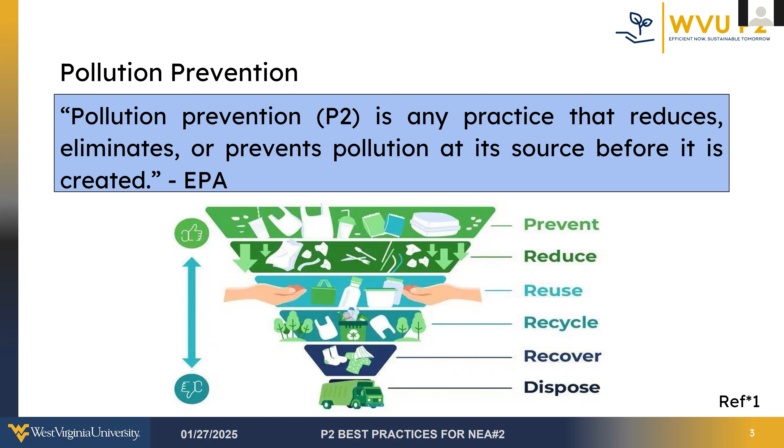So as part of the EPA's Pollution Prevention Initiative in 2015, several priority sectors known as national emphasis areas were identified. These 6 sectors were identified as priorities by the EPA Pollution Prevention Program to focus resources and efforts for maximum environmental and economic impact. These sectors offer substantial P2 opportunities and create a focused approach that allows for better resource allocation and the ability to share successful strategies across similar industries.

So the original 5 NEAs were the food and beverage manufacturing and processing industry, chemical manufacturing, processing, and formulation, automotive manufacturing and maintenance, aerospace product and parts manufacturing and maintenance, and metal manufacturing and fabrication. A sixth national emphasis area was established several years ago, and instead of focusing on a specific industry sector, the EPA realized the need for assistance with pollution prevention on tribal and native lands within the country.

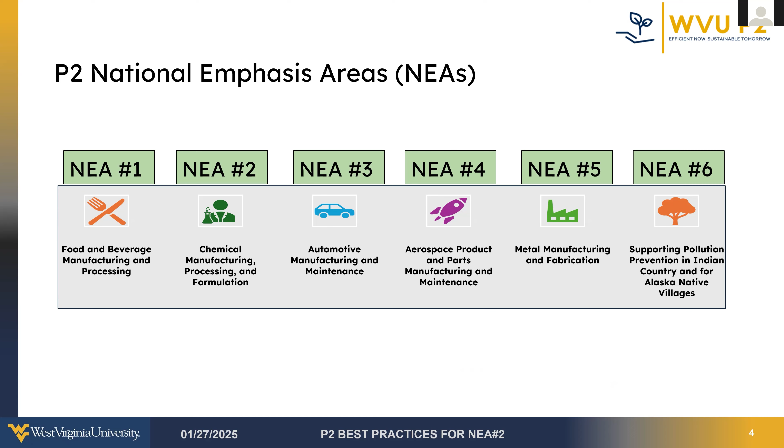So today's focus will be on the second NEA, chemical manufacturing, processing, and formulation industries.

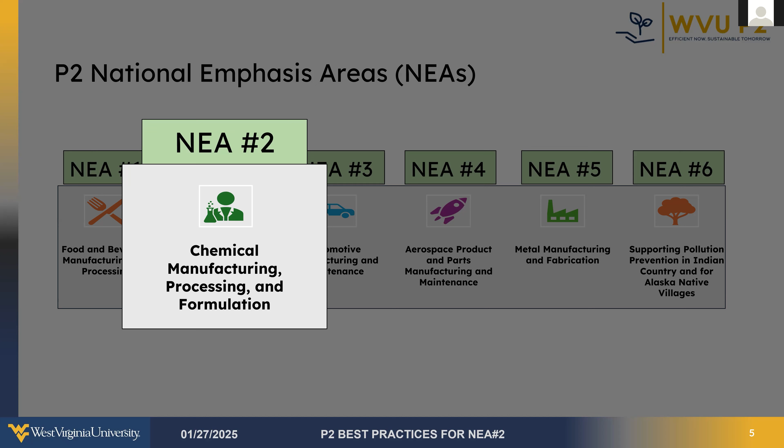So the chemical manufacturing, processing, and formulation sector includes industries classified in the NAICS industry classification codes, beginning with 325. So as of 2020, there were over 13,500 establishments within the sector, with 3,411 reporting to the Toxics Release Inventory.

So this chart shows the volume of waste managed by different approaches from 2011 to 2020 in this industry. So there was a significant increase in the proportion of waste managed through recycling and treatment during this period, as we can see with the size of the green section of the bars increasing. This positive trend indicates growing awareness and adoption of sustainable practices within the industry. The increasing reliance on recycling is a promising development, and these methods not only reduce waste disposal, but also contribute to resource conservation and energy recovery.

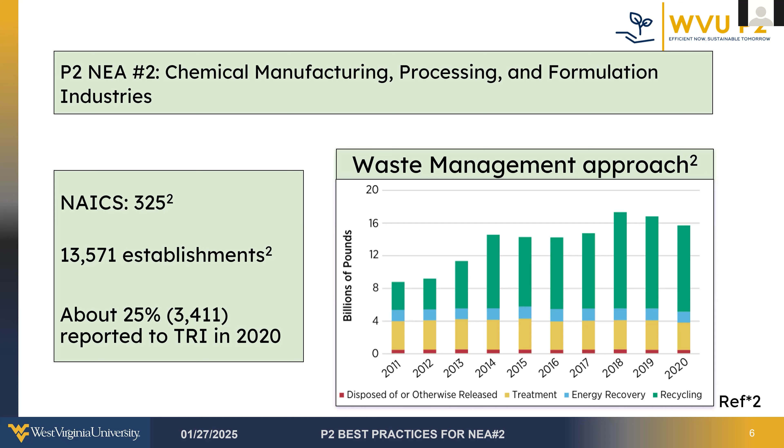Despite the progress, though, there's still a substantial volume of waste being disposed of or released, and the amount of waste being disposed has not actually decreased over time. So the recycling has just managed any additional waste that was generated. So there hasn't been much change in any reduction in the amount that's disposed or treated. So this represents an opportunity for further improvement and implementation of pollution prevention practices.

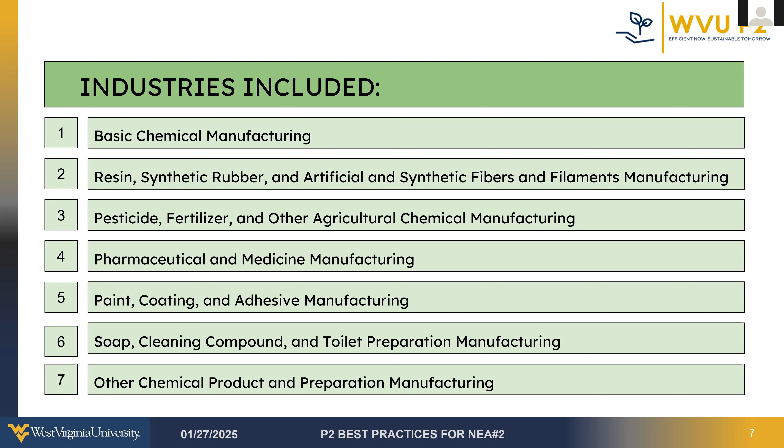So the NAICS 325 industry sector encompasses a wide range of industries that can be kind of divided into 7 categories. So basic chemical manufacturing; resin, synthetic rubber, and artificial and synthetic fiber and filaments; pesticide, fertilizer and other agricultural chemicals; pharmaceutical and medicine manufacturing; paint, coating and adhesive manufacturing; soap, cleaning and toilet preparation manufacturing; and other chemical product and preparation manufacturing.

So now that we've briefly discussed the diverse nature of the chemical manufacturing, processing, and formulation sector, let's discuss some best practices for this sector. And these best practices are divided into 4 broad categories. First, we'll discuss some best practices related to spill and toxic release control. Next, we'll discuss proper chemical storage practices. After that, we'll move towards discussing a few P2 practices related to waste management within these industries. And finally, we'll be talking about a P2 practice related to efficient water management.

So spill and toxic release control is a significant concern for industries in this sector. Unintended releases and spills of toxic chemicals, depending on the quantity, can have environmental consequences, risk the safety of the employees of the facility and those in nearby communities, and can result in significant costs, including cleanup and other fines or penalties. So let's look at a few P2 best practices related to spill and toxic release control.

So they're going to be preparing and maintaining a spill management plan, reducing styrene release in facilities producing styrene-based products, and maintaining optimal reaction conditions to reduce toxic chemical releases. So let's dive deeper into each of these practices, exploring how they can be implemented practically to make chemical manufacturing, processing, and formulation industries safer and more sustainable.

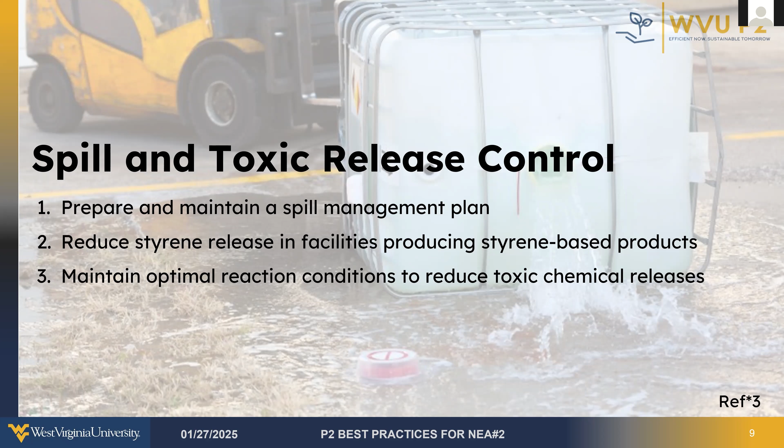First, prepare and maintain a robust, comprehensive spill management plan. Chemical spills are one of the most critical challenges faced by chemical processing and manufacturing industries, and the consequences of these spills can go far beyond the immediate cleanup and can have long-lasting impacts, especially on the environment. So chemical spills can be a concern in many different industries. The chemical manufacturing industries are certain to have large supplies of chemicals, which can make them unique from other industries. So when a chemical spill occurs, it's much more likely to be a large quantity spill, resulting in a much larger impact.

So chemical spills can cause environmental damages, including contamination of the soil, water bodies, and the air, which can disrupt ecosystems and can endanger wildlife. Chemical spills also present safety hazards, since the chemicals used are often toxic, flammable, or corrosive in nature and are used in large quantities. These spills can pose significant risks to workers. And if the spill is a large quantity, it can also affect residents in local communities or in other nearby businesses.

Next, spills can cause operational disruptions that affect business operations, including delays or halts in production. And furthermore, chemical spills can tarnish a company's reputation, making it harder to maintain customer trust and stakeholder relationships. And additionally, failure to manage spills properly can lead to severe penalties, including fines or even suspension of operations. The Clean Water Act requires many facilities to maintain spill management plans, so failure to have a spill management plan may be a compliance issue in and of itself.

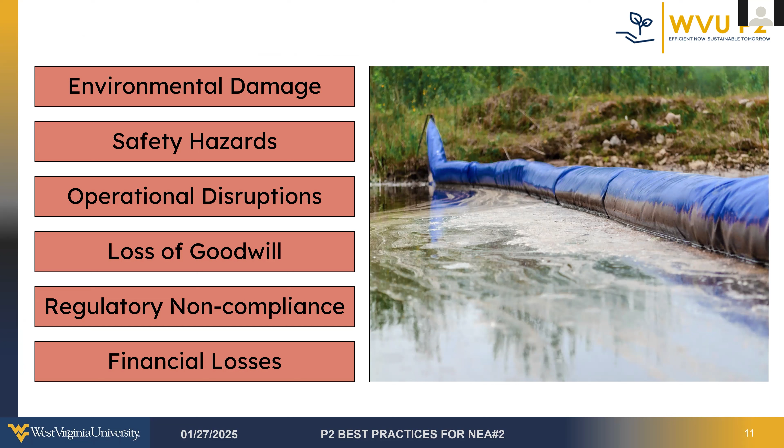So avoiding chemical spills and reacting quickly and appropriately when they do occur is the best way to minimize these losses. A chemical spill management plan defines these procedures and these requirements. So let's take a look.

So a spill management plan serves as a structured and systematic approach to prevention, management, and mitigation of the impacts of spills in industrial settings. Not only does a robust spill management plan help ensure the safety of the employees, but it can also ensure that other damages and impacts are minimized. Responding to a spill promptly and appropriately can help protect employees, the environment, equipment, and other resources.

The first step in creating a spill management plan is conducting a risk assessment of the facility. This involves identifying chemicals that are used within the facility, their quantities, their hazards and risks, and potential spill scenarios, and evaluating the risks they pose to people, the environment, and operations. So when possible, steps should be taken to minimize the risk of spills occurring. By understanding the specific hazards and vulnerabilities, we can prioritize preventive measures and be better prepared to respond to incidents.

The next step in creating a spill management plan is developing a clear response plan that outlines the step-by-step actions to be taken when a spill occurs, including emergency response, containment of the spill, and mitigation and cleanup. At each step, safety of the employee and others that could be affected by the spill is crucial. Sometimes the most appropriate response will be immediate evacuation of the facility and surrounding areas.

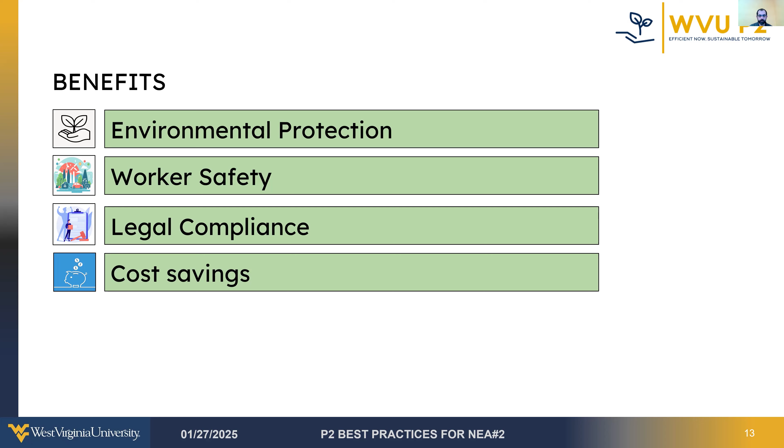So the next best practice that we'll discuss surrounds the use of styrene and reducing its release. Styrene, which is also known as ethenylbenzene, is a colorless, flammable liquid, and it's commonly used in the chemical manufacturing industry. Styrene is derived from benzene and ethylene via alkylation and dehydrogenation. Styrene has many uses within the chemical manufacturing sector, such as the following.

Styrene is the building block of polystyrene plastics. Polystyrene is used to make styrofoam, which is used for insulation foam and disposable food containers and cups. Another use of styrene is in manufacturing synthetic rubber. This type of rubber is used in tires, belts, and the production of footwear. Next, styrene is also used as a solvent in the production of resins and coatings, including paints, adhesives, and sealants.

Reinforced plastics, such as those used in automotive and marine industry applications, utilize styrene in their production. And then there are other copolymers like acrylonitrile butadiene styrene, ABS, that are used for making durable goods like appliances and toys, and those also require styrene.

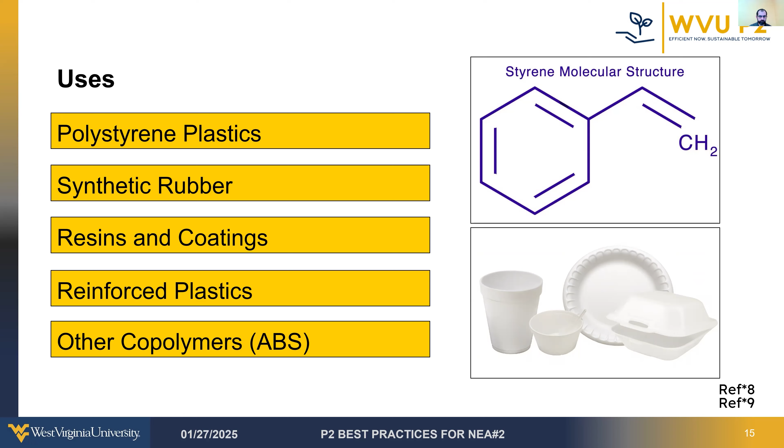So exposure to styrene is harmful for humans and for the ecosystem. Styrene exposure poses significant health risks with a range of acute and long-term effects. Acute exposure to styrene can cause irritation of the eyes and mucous membranes, causing discomfort and potential damage to the respiratory tract. Acute exposure can also lead to systemic issues such as headaches and fatigue, which can affect well-being and reduce productivity. Long-term exposure to styrene can affect the central nervous system, causing dizziness, confusion, and other neurological dysfunctions.

Continued exposure can also result in peripheral neuropathy, characterized by nerve damage that impairs mobility and sensation in the extremities. It can cause hearing loss and greatly impacts individuals' quality of life. And furthermore, styrene is classified as a probable human carcinogen, meaning that it's likely to cause cancer with extended exposure. So these health impacts underscore the urgent need for enhanced safety measures in industries handling styrene to protect workers and surrounding communities.

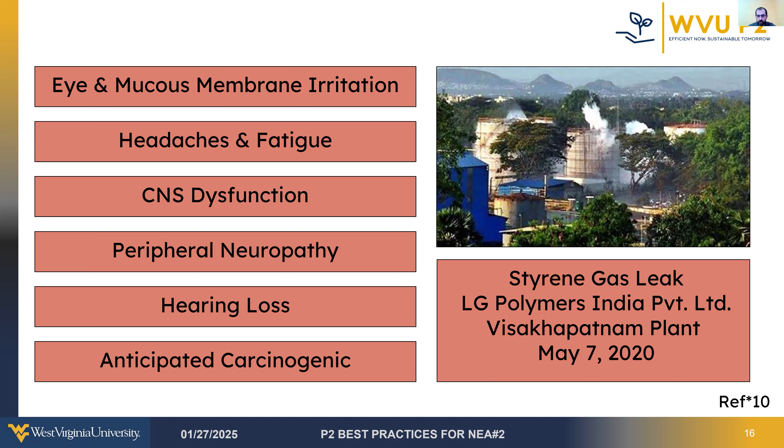So to emphasize the risks of styrene, in May of 2020, there was a tragic styrene leak at a plant in India. This gas leak at the LG Polymers plant resulted in 12 deaths and over 300 hospitalized, and 20 of those that were hospitalized were in severe condition requiring ventilator support to recover. So in addition to the health effects of styrene, releases into the environment can harm aquatic life and contribute to the formation of smog.

So what are some steps that can be taken to reduce the risk of styrene exposure? The best way to avoid the risk of styrene exposure is to not use styrene at all. As mentioned earlier, styrene has solvent and non-solvent uses. In processes where styrene is used as a solvent, substituting in a less or non-toxic alternative may be an option, such as acetone or water-based solvents. On the other hand, when styrene is used as a building block for plastics specifically, switching to polyethylene-based plastics may be a viable option. So getting away from the styrene and using polyethylene instead.

So when styrene can't be substituted, processes should be assessed for opportunities to reduce its use. For example, minimizing overspray when spraying styrene-based products and using activated carbon filters to capture the vapor are good options to minimize exposure. Optimizing operating practices is another option. Ensure that styrene storage, transportation, and the use of styrene all follow industry best practices to minimize risk of major accidental releases.

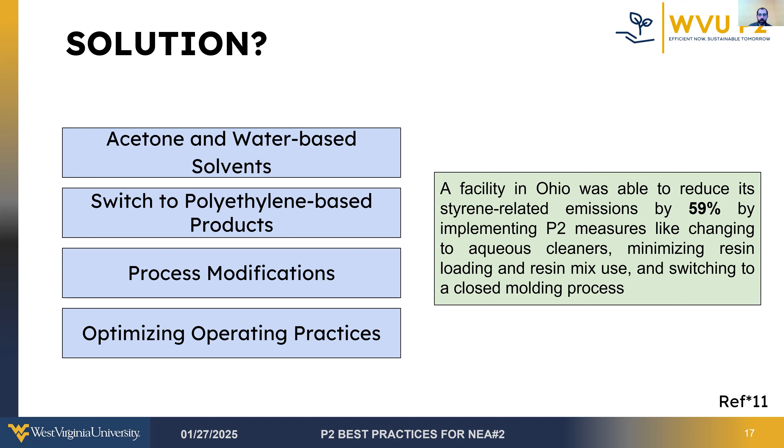So in the case of one Ohio-based plastics product manufacturer, styrene release was reduced from 32,000 pounds to 13,400 pounds over a 10-year period utilizing these sorts of practices. That was a 59% reduction in styrene release over that period. They were able to do this by switching from styrene-based cleaners to water-based cleaners, minimizing resin loading and resin mix use, and switching to a closed molding process where the resin isn't exposed to the atmosphere while it's curing.

So the next best practice that I'll discuss will be maintaining optimal reaction conditions to reduce toxic chemical releases. Improper chemical reaction conditions can pose significant challenges in the chemical manufacturing and processing industries. Some of the risks of improper chemical reaction conditions are: first, they can lead to the formation of unwanted byproducts. These byproducts can disrupt the desired chemical pathway and reduce the yield of target products. This inefficiency not only wastes raw materials, but it also contributes to reduced reaction efficiency, which ultimately lowers the overall productivity of the process.

The generation of byproducts and unoptimized processes results in higher waste management costs. Companies must allocate significant resources towards safely handling, treating, or disposing of chemical waste, leading to higher operating costs. Also, any additional raw materials, energy, and labor required to compensate for the inefficiencies will further increase the operating costs. Improper reaction conditions can also compromise the quality of the final product, resulting in a product that may not meet market or regulatory standards, which could damage the company's reputation and customer trust.

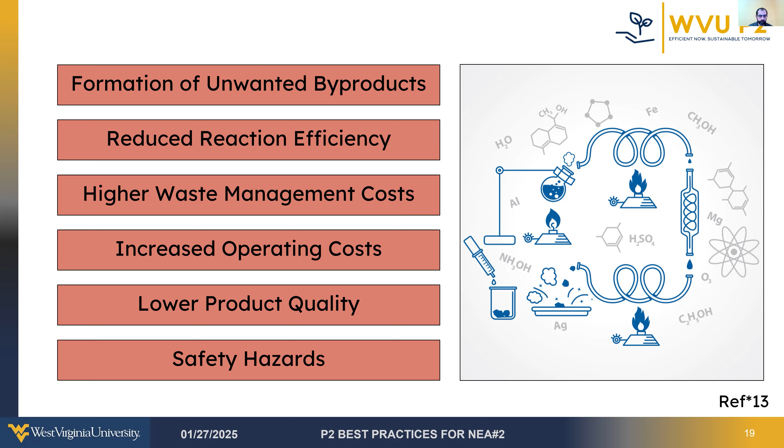And finally, improper reaction conditions introduce safety hazards. Deviations in temperature, pressure, or reagent concentrations can result in uncontrolled reactions, potentially leading to fires, explosions, or the release of toxic substances. These risks endanger both workers and the surrounding environment. So there are a few methods that can be used to maintain optimal reaction conditions. Automated monitoring systems are one of the best options. These systems enable real-time tracking of important parameters such as temperature, pressure, and concentration, ensuring that optimal reaction conditions exist. When conditions deviate from expected, the operator will be able to respond immediately.

Additionally, collecting and analyzing sample data on the product in real time can help ensure that the process is running as expected, ensuring precision and reliability. So by closely monitoring these systems, if things do fall out of line, we can get them back in line quickly and avoid any potential problems. Operator training programs are also going to play a critical role in ensuring that personnel are equipped to manage processes effectively, identify potential issues, and respond appropriately to ensure optimal chemical reaction conditions. And additionally, the condition of the equipment can impact the reaction conditions, so regular assessment and maintenance of process equipment should be implemented. Keeping machinery in top condition prevents malfunctions that can disrupt reactions, create safety risks, or cause chemical reactions to deviate from what is required.

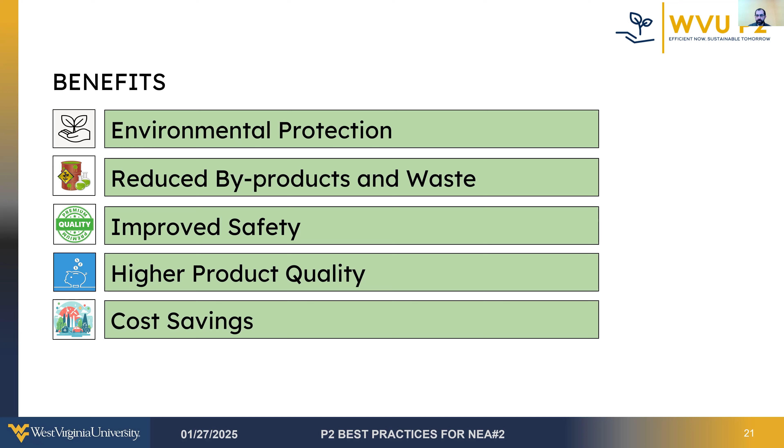So ensuring that chemical reactions are optimized leads to several benefits. Better control over the reaction conditions helps protect the environment by reducing the risk of industrial accidents or disasters and reducing byproducts and waste that may be at risk of ending up in the environment. There are also safety benefits to these as well. Industrial accidents can cause injuries or deaths, and anytime that waste must be handled, it can create additional risks. Optimal reaction conditions also ensure higher product quality, and all these benefits together lead to cost savings and an improved bottom line.

So moving on to the next section, we'll discuss a best practice related to chemical handling. And that's going to be implementing proper chemical storage practices. So improper chemical storage practices can cause several issues. Poor storage conditions often lead to chemical deterioration, where chemicals and other stored substances degrade over time, losing their effectiveness and potentially generating hazardous byproducts. This often happens when an accurate chemical inventory is not maintained and chemicals are quote unquote lost. If these degraded chemicals are eventually used, it can affect the quality of the final product.

Another critical issue is increased risk of leaks and spills. Improperly sealed or stored chemicals can escape their containers, leading to environmental contamination, workplace hazards, and cleanup challenges. These incidents also contribute to increased chemical waste, as spilled or degraded chemicals can no longer be utilized, requiring additional resources for disposal. The combination of these factors creates significant safety hazards. Leaks, emissions, and deteriorated chemicals can increase the risk of fires, explosions, and other toxic exposures, posing a serious threat to both workers and, in large enough quantities, to surrounding communities.

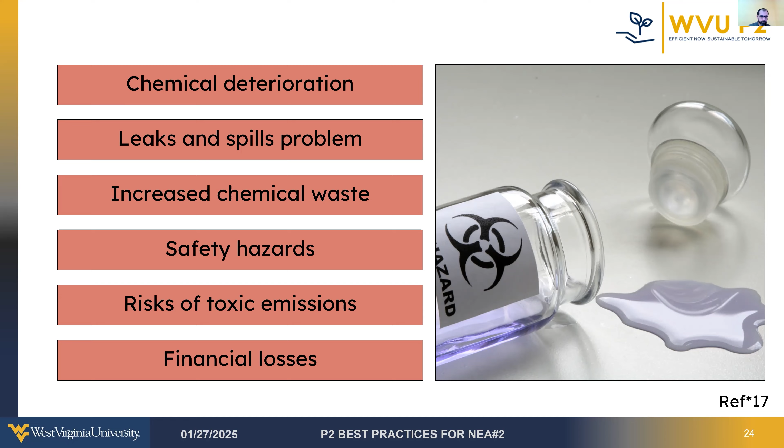Additionally, improper storage heightens the risk of toxic emissions, which can harm workers' health, pollute the environment, and result in legal and reputational damage for companies. So altogether, these problems lead to various financial costs, leading to unnecessary financial losses. So the following are steps that should be taken when storing and organizing chemicals. So the first step above all of this is going to be creating a chemical inventory. So the amount and location of each chemical in the facility should be recorded and maintained, and safety data sheets for each of these chemicals should be compiled and readily available in the facility.

During this time, the following practices should also be implemented. So the first is going to be classification and segregation. So chemicals should be grouped and stored based on their compatibility to prevent dangerous reactions, such as mixing acids with bases or oxidizers with flammable substances. This practice minimizes risks and ensures safer handling. Next is going to be labeling and containment. Proper labeling ensures that every container is clearly identified with its contents, hazards, and handling instructions. Additionally, secure containment prevents leaks, spills, and exposure to harmful chemicals, safeguarding workers and the environment.

So environmental factors such as temperature, humidity, and ventilation must also be carefully monitored and regulated to prevent chemical deterioration or unintended reactions. Chemicals need to be protected from external harm, such as physical damage, fire hazards, or other contamination. So proper shelving, spill containment systems, and fire suppression mechanisms are all essential measures to ensuring safety. And finally, routine inspections are crucial. Regular checks can identify and address potential issues like damaged containers, labeling errors, or deteriorating conditions before they escalate into significant problems. But again, all of this starts with maintaining a chemical inventory and just knowing where all of your chemicals are.

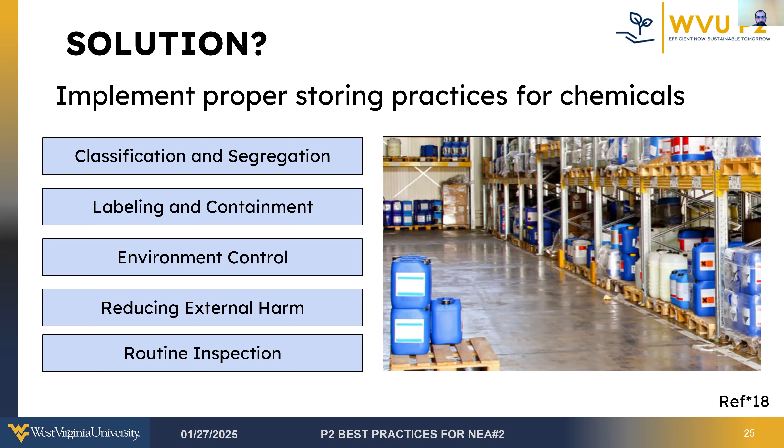The proper chemical storage practices offer significant benefits to the chemical manufacturing industries. So first is going to be environmental protection. These practices prevent spills, leaks, and toxic emissions, reducing the risk of contamination to soil, air, and water. Proper storage ensures chemicals remain stable and usable for longer periods of time, leading to reduced chemical waste and more efficient utilization of resources. Industries also benefit from regulatory compliance, as adhering to storage standards helps meet legal requirements, avoiding unnecessary fines or penalties.

Also, minimizing loss from wasted chemicals, unnecessary repurchases, accident-related downtime, and other cleanup due to improper storage leads to cost savings. And finally, these practices significantly enhance safety by reducing the risk of fires, toxic exposures, and hazardous reactions, creating a safer environment for workers and surrounding communities.

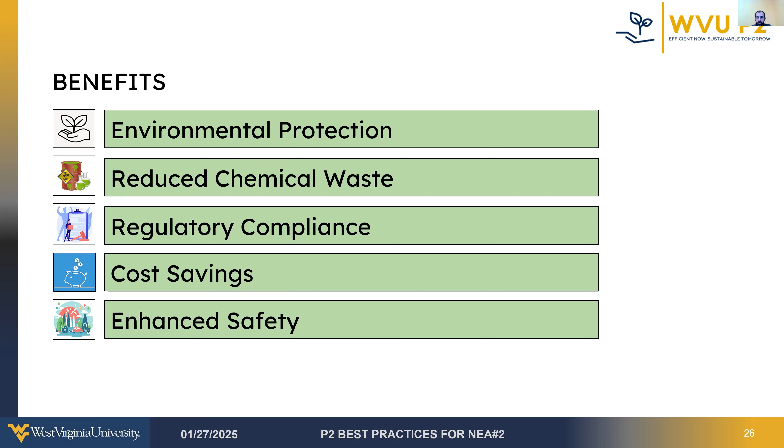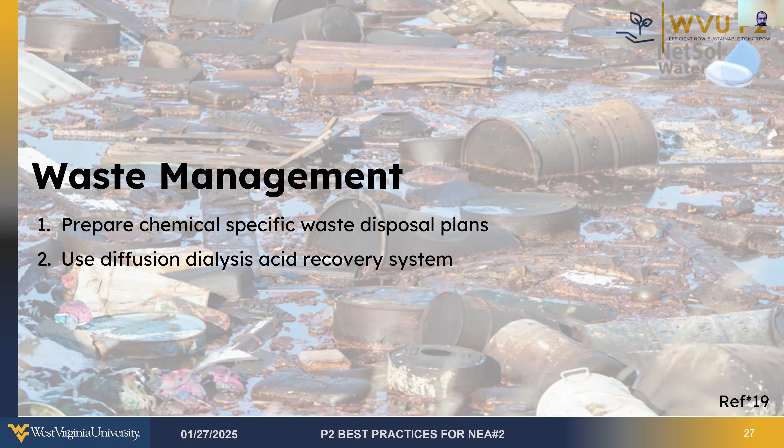So next, let's talk a little bit about waste management. So waste management is crucial in these industries, as the waste is often more toxic than in other industries. Since different chemical wastes have different properties, preparing and implementing specific waste disposal plans is a step that can be taken to reduce risks.

Improper waste management can cause a multitude of problems. For example, it creates environmental hazards since it increases the chances of toxic chemicals being discarded improperly. Improper waste management, specifically mixing incompatible chemical wastes, can lead to unintended reactions such as the release of toxic fumes, corrosive substances, or hazardous byproducts.

This can cause significant harm to the environment by contaminating water, soil, and air, posing long-term ecological consequences. It also risks the safety of employees and nearby residents and businesses.

Moreover, mixing chemical waste complicates the separation and treatment processes, making management and disposal more resource-intensive and time-consuming. Specialized treatment would likely be needed, which increases waste disposal fees and leads to lower operational efficiency. There are also potential fines for violating waste management regulations.

Furthermore, incompatible chemical mixtures can release harmful gases or vapors, endangering not only workers, but also nearby communities and ecosystems when quantities are large. These emissions can also result in regulatory violations and reputational damage.

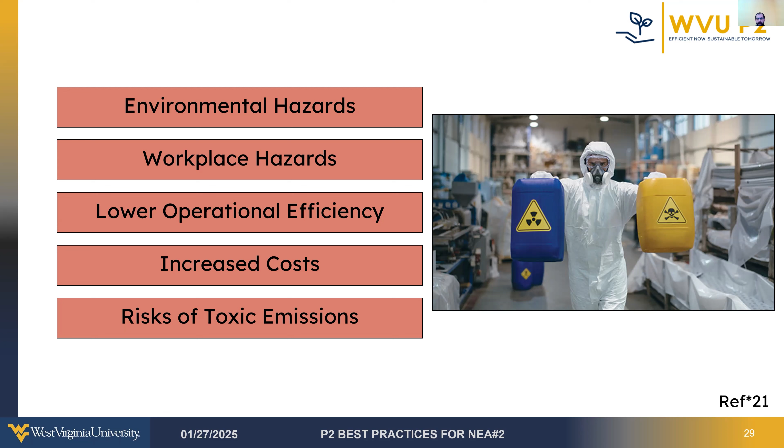Some chemicals as waste can be mixed together if they're compatible, but if there's any uncertainty, chemical waste should be isolated individually. Some of the guidelines for chemical compatibility when it comes to waste disposal are as follows.

First, waste from strong acids and strong bases should be stored separately in corrosion-resistant containers with the contents labeled clearly. If waste from acids and bases are mixed in an uncontrolled manner, it can result in unpredictable chemical reactions and generation of extreme heat and dangerous fumes.

For disposal, acids and bases can often be neutralized in a controlled manner to create pH-neutral solutions that are easier to dispose of. For example, sulfuric acid waste from fertilizer production and sodium hydroxide waste from soap manufacturing can both undergo a neutralization process. However, care must be taken when selecting the neutralization agent, and the process should be monitored and controlled carefully to maintain safety.

Organic solvent waste should be isolated, as it requires specialized disposal. Since these solvents are often toxic and volatile, their disposal involves incineration at high temperatures in facilities with pollution controls.

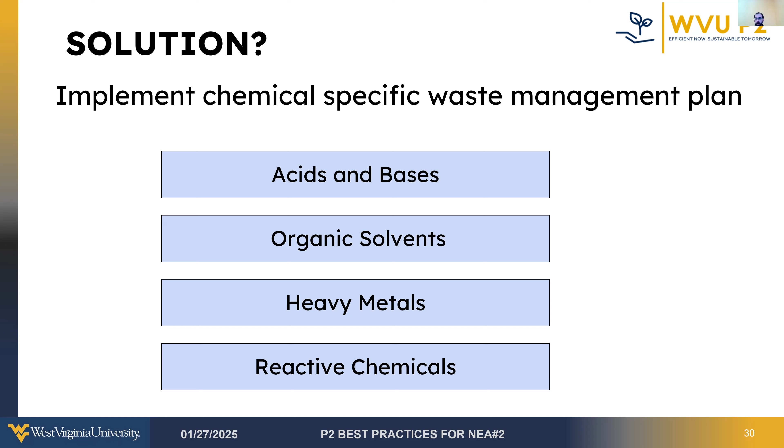As an example, sodium metal waste from petrochemical refining and peroxide-containing waste from polymerization processes must be stored separately from incompatible substances and heat sources to avoid potential risks.

Improper disposal of pharmaceutical waste, including expired drugs or solvent residues, can lead to contamination of water supplies and ecosystems. Pharmaceutical waste management involves segregating active and non-active pharmaceuticals, followed by incineration or chemical treatment.

Radioactive waste, which is often generated in the chemical processing industry through the use of catalysts or tracer studies, requires segregation based on its half-life, along with shielding during storage to prevent radiation exposure. For example, uranium or thorium used in catalysts, as well as low-level radioactive isotopes, must be logged in detailed records and handled under strict protocols before being sent to specialized facilities for disposal.

Biological waste presents another challenge, especially in bio-based production industries. This waste includes materials contaminated with infectious agents, such as enzyme residues from pharmaceutical fermentation or from microbial byproducts. The disposal process involves autoclaving or incineration, which sterilizes the material before final disposal. To ensure safety, biological waste should be collected in biohazard-marked containers and handled with appropriate personal protective equipment.

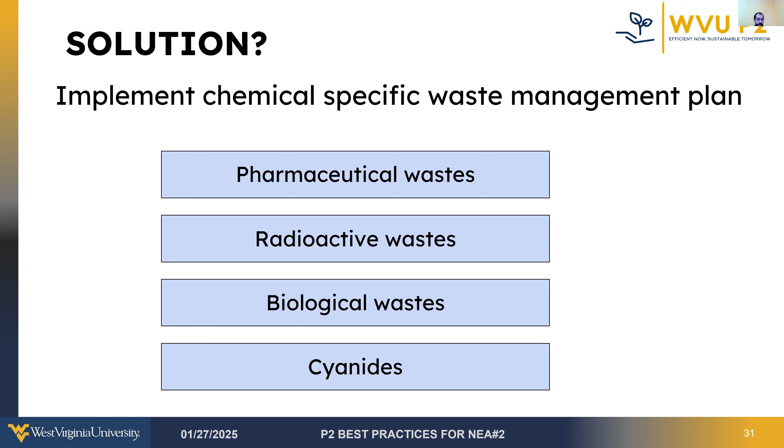So appropriate chemical-specific waste management will have several benefits. First and foremost, these plans ensure environmental protection by preventing harmful waste from contaminating soil, air, and water, thus preserving ecosystems. Secondly, they facilitate resource recovery by enabling the segregation and recycling of reusable materials, reducing overall waste and promoting sustainability.

Furthermore, these practices also help industries achieve regulatory compliance, avoiding penalties while maintaining a positive reputation for adhering to environmental laws. Additionally, appropriate chemical-specific waste management offers cost savings by minimizing waste disposal fees and reducing the need for remediation after accidents or spills. And finally, proper waste disposal plans significantly enhance workplace safety by mitigating risks associated with hazardous chemical reactions, reducing the likelihood of fires, toxic emissions, and worker exposure to harmful substances.

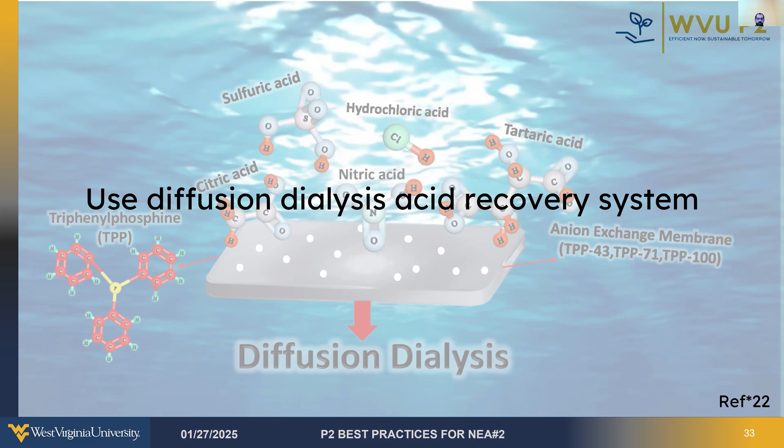So in the previous slides, we briefly discussed neutralization of waste acids, but there is another potential option there, and that's the recovery of acids using a diffusion dialysis recovery system. So first, let's talk about the consequences of improper disposal of acid waste. So acid waste poses environmental hazards, as improper disposal can lead to soil degradation, water contamination, and harm to aquatic ecosystems. Such pollution can have long-term ecological consequences and damage biodiversity.

In the workplace, acid waste introduces significant hazards, as exposures to acidic substances can cause burns, corrosion of equipment, and dangerous reactions that increase the risk of fires or toxic emissions, jeopardizing worker safety. Also, failing to manage acid waste properly can result in regulatory compliance issues. Strict environmental laws govern acid waste disposal, and violations can lead to heavy fines, operational shutdowns, and reputational damage. And waste of many acids can be recovered for reuse, but without proper systems in place, these valuable resources are lost.

So the solution here, as I said, is implementing a diffusion dialysis acid recovery system. And this is one of the most effective methods of recovering acids for reuse. So a diffusion dialysis acid recovery system is a membrane-based separation technology. And in these systems, acid waste is passed to a specialized diffusion dialysis unit containing semi-permeable membranes. These membranes allow acids to selectively diffuse through, separating the usable acid from impurities in the waste. The recovered acid that's diffused through the membrane is collected, ready for reuse in the production process, while the remaining impurities and waste can be safely disposed of.

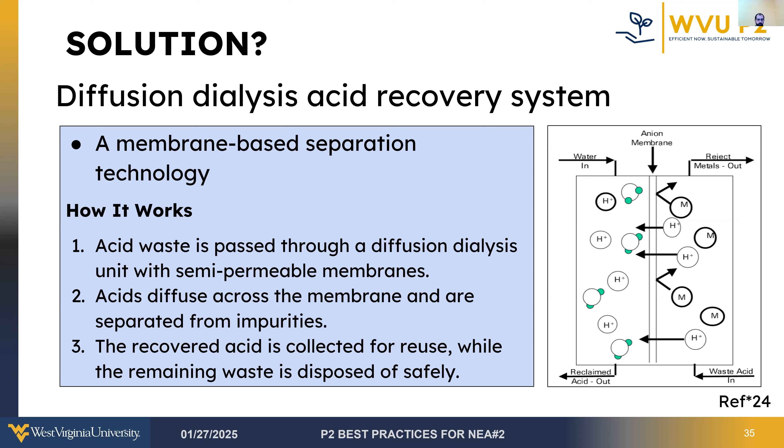So the system as a whole kind of works as follows. The used acid is metered through the system and is in contact with one side of the membrane, and that's an anionic exchange membrane. So water, on the other hand, is metered in a countercurrent fashion on the recovery side of the membrane, which causes the majority of the acid to migrate through the membrane, rejecting contaminants such as heavy metals along the way.

Then the purified acid and water is directed back to the process tank, while the contaminated spent acid stream continues to the metal recovery waste treatment for further processing. And fresh acid in proportion to the unrecovered amount is added to the bath to maintain the concentration within the correct operating parameters. So in one case study, a stainless steel fittings manufacturer was able to recover 86% of the nitric acid they used in the process using this technology.

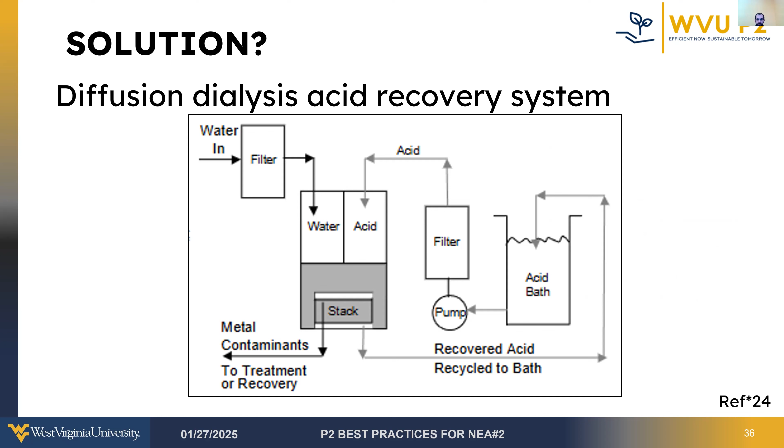So the use of diffusion dialysis acid recovery systems helps to recover acids and reduce hazardous waste resulting from acid contaminations. This leads to multiple benefits, including protection of the environment from the acid waste, resource recovery, maintaining compliance with regulations, and altogether financial savings. So as I was mentioning, in this one case, there's an Illinois manufacturer of stainless steel fittings and flanges. They operated a 1,500 gallon pickling bath composed of nitric acid and ammonium bifluoride. And they were changing this bath every 6 to 8 weeks, or about 7 times per year.

And as a result of this, they were incurring annual costs of $18,000 for disposal and $13,000 for fresh chemicals. So some engineers from the Illinois Sustainable Technology Center assisted them with implementing a diffusion dialysis acid recovery system, which allowed them to recover 86% of the nitric acid and 30% of the ammonium bifluoride. So this reduced their need to recharge the bath from 7 times per year to 2 times per year. So that proved to be a cost-effective and sustainable solution that saved them upwards of $10,000 a year. So there were reduced disposal costs, reduced chemical costs, reduced pickling time, and decreased rework with those modifications.

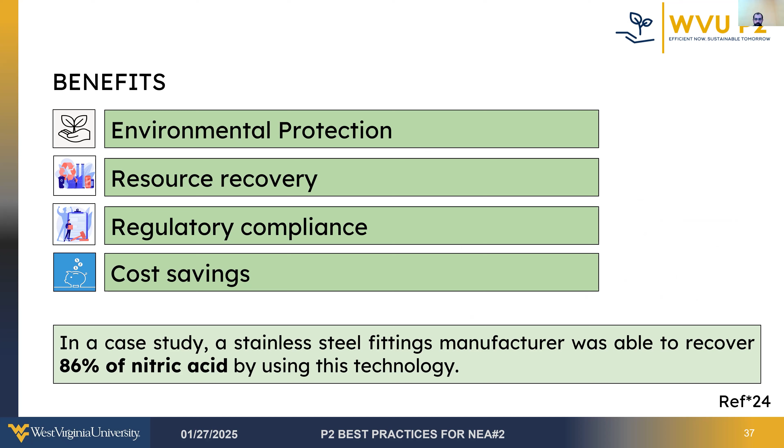And finally, the last category will be water management. So fresh water is one of the most valuable resources. Every action to save water is a step towards building a sustainable future. So in this final section, we'll be discussing pollution prevention best practice related to water management in one chemical manufacturing industry.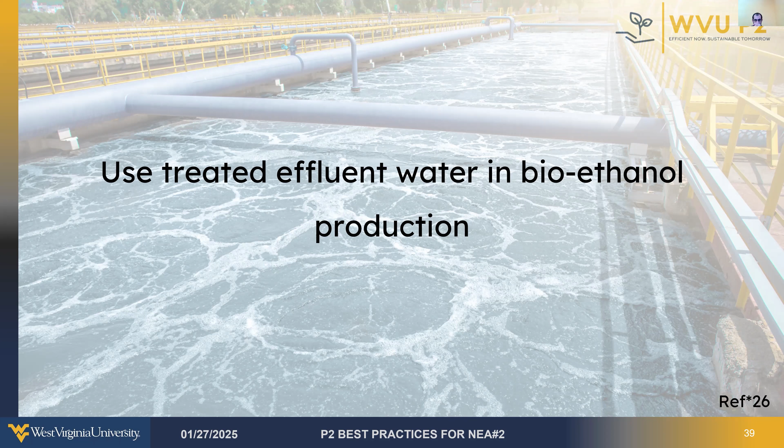And specifically, that's going to be treating and reusing effluent water in bioethanol production. So bioethanol is a promising source of renewable energy, but the production of bioethanol requires significant amounts of water, requiring multiple gallons of water to be used for each gallon of bioethanol produced. So there are two primary types of bioethanol production, and each of these do require a large amount of water. So that's the corn grain ethanol and cellulosic ethanol.

So corn grain ethanol is produced in a process of grinding, liquefying, fermenting, and distilling corn. Most bioethanol is produced using this method due to lower capital costs. The water is required in almost every step of this process, resulting in a use of 3 to 4 gallons of water to produce 1 gallon of bioethanol.

Cellulosic ethanol, on the other hand, is produced in a biochemical process where the cellulose in biomass, such as grass and wood chips, is hydrolyzed into sugars, then fermented into ethanol. So during this process, pretreatment, enzyme hydrolysis, and fermentation all require a significant amount of water, with 6 to 10 gallons of water required to produce each gallon of ethanol.

So while bioethanol is much more environmentally friendly in use than petroleum-based fuels, we have to consider the environmental impact of the water usage as well. So high water consumption places tremendous strain on local water resources, especially in regions where water availability is already limited. And furthermore, as bioethanol production continues to expand to meet renewable energy goals, concerns about the sustainability of this water usage continue to grow. So ensuring efficient water management is critical not only for the industry's growth, but also for protecting our natural resources.

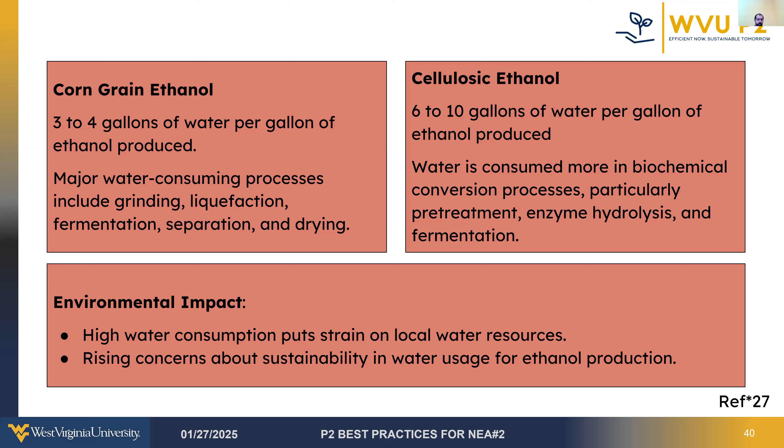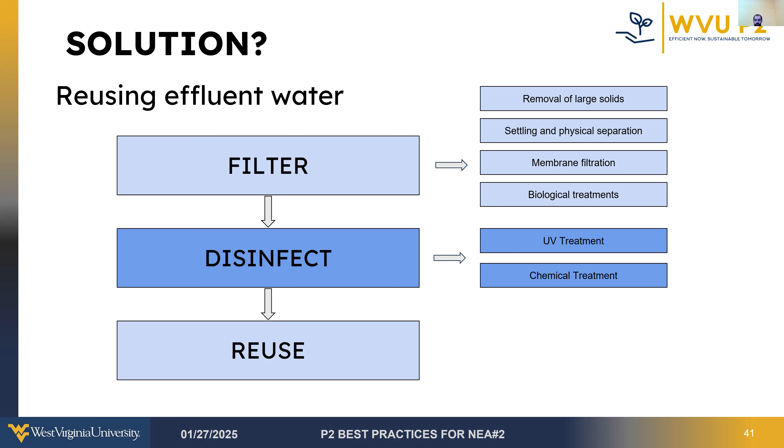So the solution here, or one possible solution here, is to utilize effluent wastewater instead of using fresh potable water for the process. So by sending effluent water through a multi-stage filtration process, followed by a disinfection process, the water can be reused in the production of bioethanol. So during the filtration stage, large solids are first removed. Afterward, the wastewater is allowed to settle and physically separate to remove the remainder of the solids. And next, the water is filtered through a membrane, then treated biologically. Then during the disinfection stage, the filtered water is treated with UV, followed by a chemical treatment. And at that point, it can be reused in the bioethanol production process.

So the use of treated effluent water in bioethanol production offers several benefits that can significantly enhance the industry's sustainability. So first and foremost, it conserves fresh potable water. So by reusing treated effluent water, the industry can reduce its reliance on freshwater resources, minimizing the strain on local ecosystems and preserving natural water supplies. This approach helps mitigate the environmental footprint of bioethanol production. Next, treated effluent water, which might otherwise be wasted, is turned into a valuable input for the production process. This not only maximizes the utility of existing resources, but also contributes to a circular economy within the industry.

Regulatory compliance is another key benefit. Many regions are implementing stricter water usage and waste disposal regulations. By using treated effluent water, bioethanol plants can meet these requirements more effectively, reducing the risk of penalties or operational shutdowns. And finally, associated cost savings. So by reducing the dependency on expensive fresh water, these producers can achieve significant economic benefits over time.